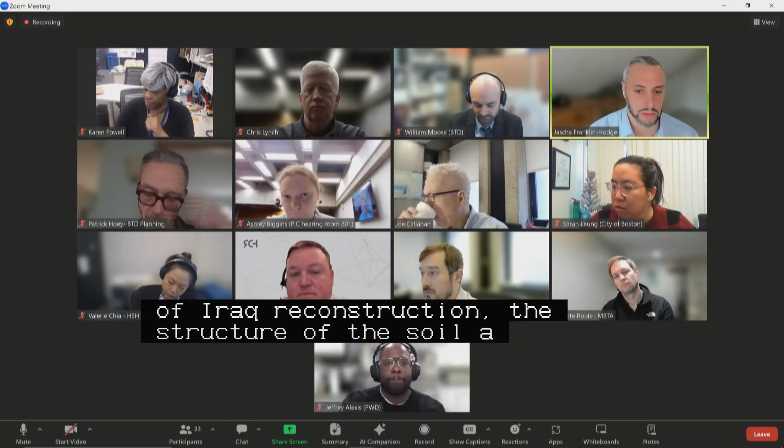So with that, I will read this item into the record. Public hearing number 1, a petition by the City of Boston Public Works Department for the making of specific repairs within the following public ways in South Boston, consisting of curb realignment, roadway and sidewalk reconstruction with structural soil, as well as new and relocated pedestrian ramps, specialty pavement, street lighting infrastructure, street trees, storm drain infrastructure, bike racks, street furniture, bollards, trash receptacles, raised crosswalks, protected bicycle facilities, and driveway curb cuts. Congress Street between Sleeper Street and Boston Wharf Road, Sleeper Street between Congress Street and Seaport Boulevard, A Street between Congress Street and Melcher Street, Boston Wharf Road at Congress Street, Seaport Boulevard at Sleeper Street.

This was new business on March 14th, as shown on a set of plans entitled City of Boston Public Works Department Engineering Division, Specific Repairs Plans, Congress Street, Sleeper Street, and A Street, South Boston, 19 sheets dated March 28th, 2024. Would the proponents please introduce themselves, their affiliations, and give us an update on any changes since your new business hearing, as well as any potential progress on some of the outstanding community issues that were identified in new business.

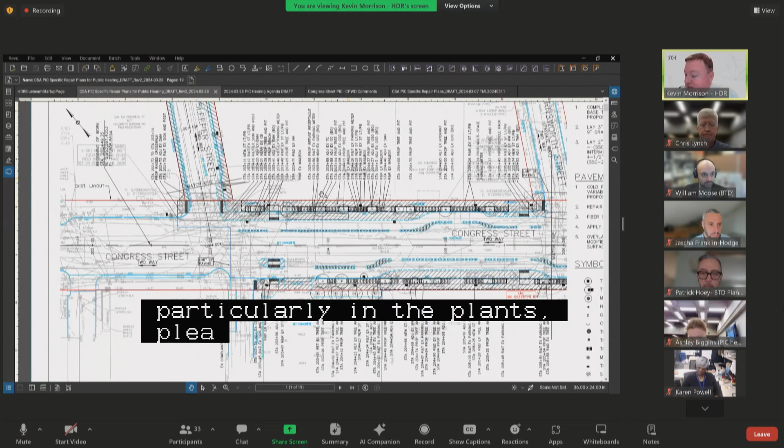At Congress and Sleeper, we're currently proposing that raised crosswalk. We're doing everything we can to double check to make sure that we're making every kind of improvement we can at this spot. We do have a proposed curb bump out into Sleeper Street, which narrows the crosswalk length, and the combination of that and the raised crosswalk will really highlight the pedestrian first priority that we're really trying to establish here.

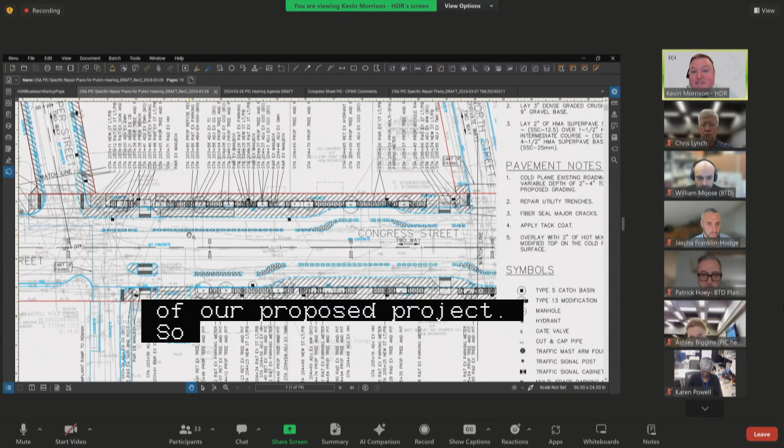The rest of the sheet is pretty much the same as you had last time, but we have separated cycle tracks at roadway level on both sides of Congress Street as part of our proposed project, completely separated from the roadway. We also have bumped out the sidewalks significantly. The sidewalks on Congress Street are at least 10 feet wide, and are in many areas just up to 17 feet wide where possible.

Kevin, if I can just chime in here, there was a comment about having a minimum 4-foot wide passageway from the walking pathway to the cafe or seating areas, and on the north of this sheet, you can see the outline of a potential location for the blue bikes, but we added the passageway to the right of that. To the east, you can see by the mailboxes. That area's exact use is in flux, so the location of that passageway is also in flux.

Likewise, we had passageways to the cafe spaces that we want to make sure the owners of the cafes work out with them, but there are passageways to all of the areas that are either existing cafe or future cafe spaces.

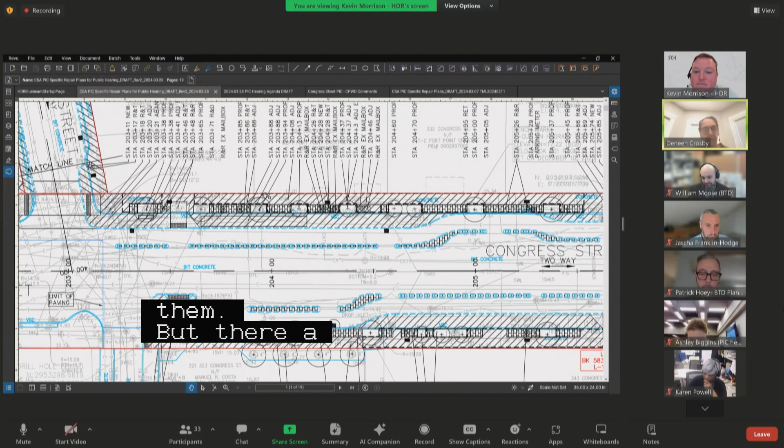Thanks, Deneen. We did receive one comment from Disabilities that the landscaping strip with the existing and proposed street trees is in the exact same spots as today. That's because the underground utility conflicts under Congress Street are pretty extreme, from curb to curb, the entire street's utilities. We did try to see if we could push those landscape strips out at one point, but with the utility conflicts it was just impossible.

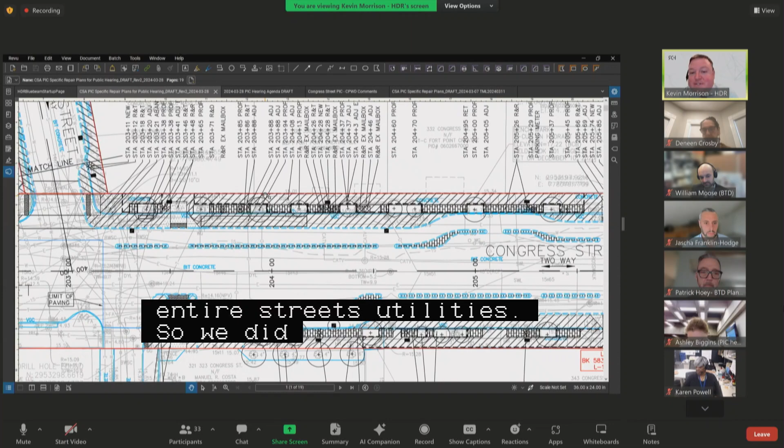So we have at least a minimum 5-foot wide path to travel along the building faces. We have that landscape strip with occasional concrete cut-throughs to get to the wider sidewalk, and then where possible, we have that extra sidewalk space out into the road. We have some benches in that area, cafe space, whatever that may be.

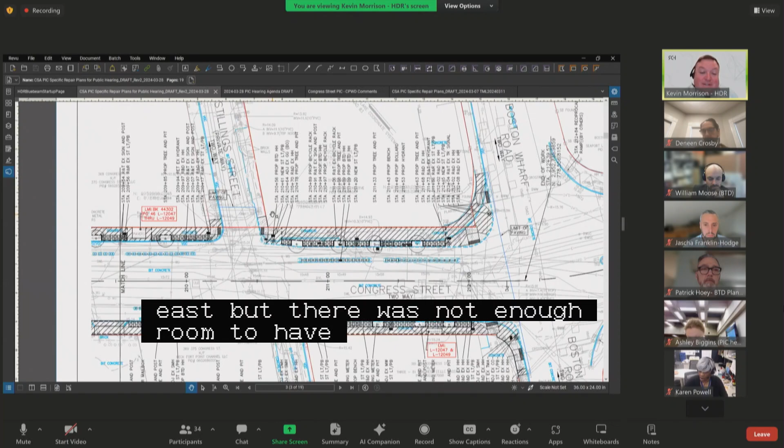Frontage Street also has a raised crosswalk. One change we had to make, and we don't take this lightly based on the tragedy that just happened at Sleeper Street, is at Stilling Street we had to remove the raised crosswalk we had originally proposed. That's because the sidewalk at Stilling Street on Congress Street on the north side is 10 feet wide. We are making it slightly wider to the east, but there was not enough room to have a raised crosswalk and have the accessible path of travel lie entirely within the city's right of way. That's because Stilling Street is not a city-owned street, it's a private way.

We're still looking to see if there are any other improvements we can make, but for now that raised crosswalk had to be removed. The other ones we had proposed all still remain.

On Sleeper Street, working with Dan Miller at BTD right now, while they're not shown on the plan yet, we propose to add 2 speed humps onto Sleeper Street. We have 2 locations we've picked that work from a drainage perspective and traffic safety. We're working with BTD to get those added to the plans, and those will be put in before the site goes out for advertisement.

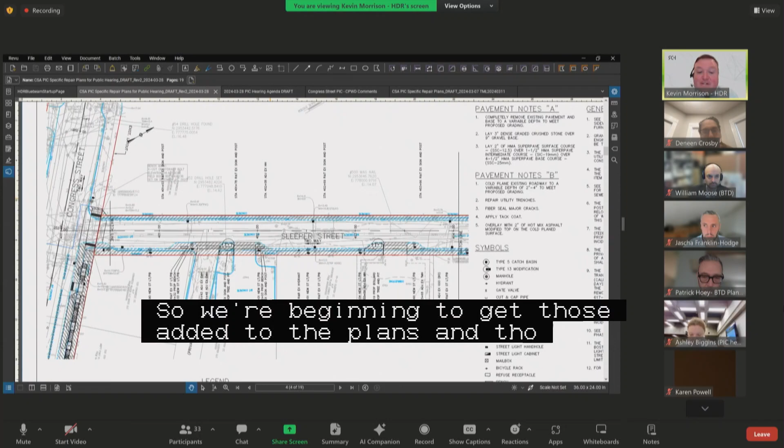Also on Sleeper Street, and 2 other locations on this project, we added in reciprocal ramps. This was both a PIC and Disabilities Commission comment, so we have these new reciprocal ramps added in. The one at Sleeper Street and Seaport Boulevard will require an architectural access board variance. The existing slopes coming off the Moakley Bridge and around the corner to Martin's Park are very steep, so we can get an accessible ramp in, but the ramp going around the corner up onto the bridge won't meet the maximum slope requirements from AAB, so we'll be pursuing a variance for that.

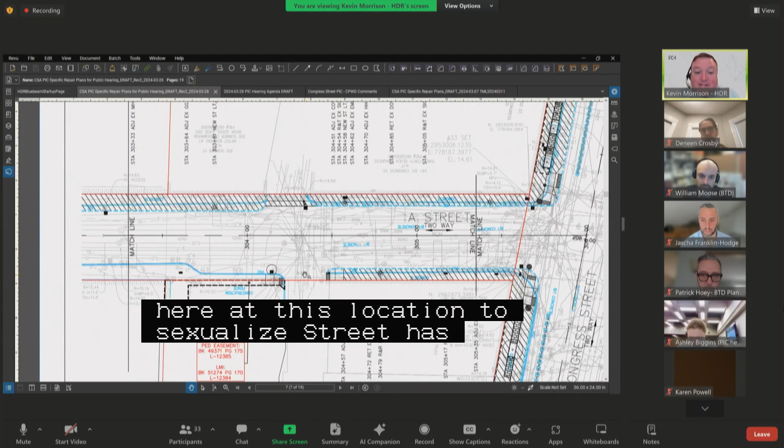On A Street, the same thing: we're going to be adding in a reciprocal ramp at the alleyway underneath the Summer Street Bridge. We're also adding in a catch basin at this location. This section of A Street has very poor drainage, and adding a catch basin while we do the ramp will help take care of that and eliminate a recurring problem on that stretch of street.

Another added benefit on A Street: we propose a 10-foot sidewalk, which will allow us to have a 5-foot passageway, an accessible route around the existing bridge stair up onto Summer Street, which we have nothing like today. The sidewalks are extremely narrow, so that'll be a good improvement for the community for pedestrian safety.

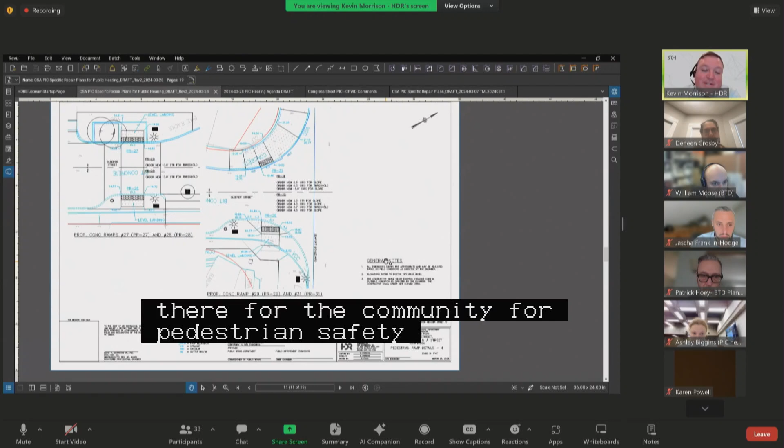Beyond that, we've gone through and met, at least remotely, with BTD. We believe we covered all the comments from both those agencies. For utilities, we did receive some Boston Water and Sewer comments today which I haven't had a chance to look at yet. The only other response we got from the utility agency was National Grid. They may be looking to improve some of their gas infrastructure before this project goes out for construction. So that's just the consultants, and we're working with Public Works and the utility company to coordinate that effort.

But other than that, the design is mostly unchanged from that point.

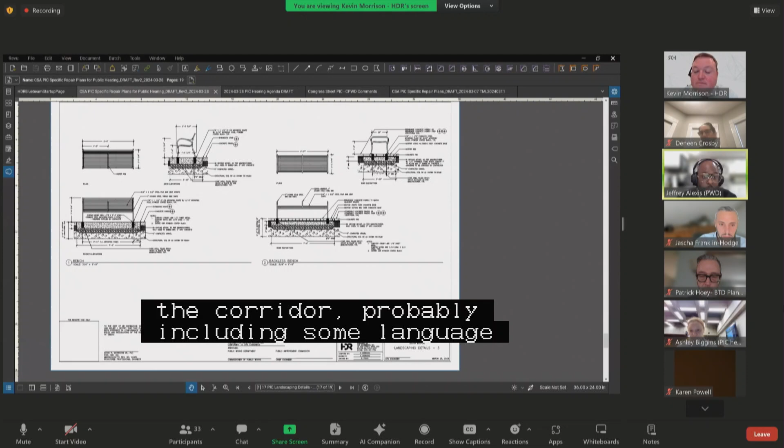We will be working with Boston Water regarding infrastructure located in the sidewalks, and maybe some conflicts with the street trees. We'll continue to work with OGI as well as the Parks Department to figure out the best path forward to provide street trees along the corridor. We'll probably include language in the contract to address it, should utilities be discovered where we're proposing a street tree—we'll look at providing something else. But ideally we're going to try to provide street trees along the corridor. We'll look at species; they'll be within the existing line of street trees on the corridor, but with the permeable paver strip, it should allow the roots to get enough water without impacting the sewer infrastructure. We're working on that and will definitely have a way to address it as part of the final design.

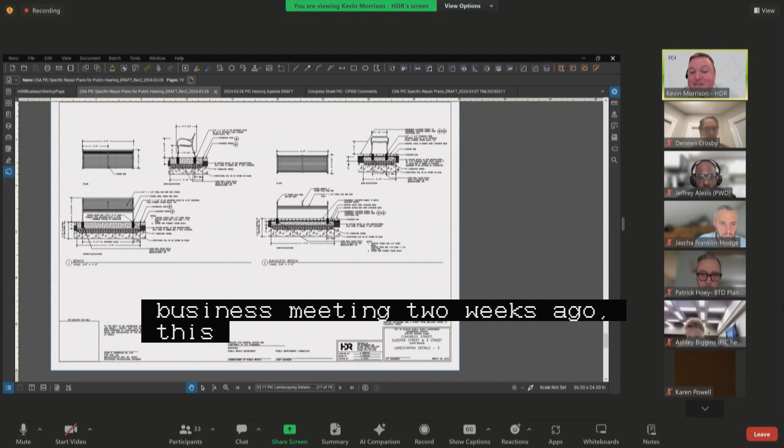Thanks, Jeff. For those who didn't get a chance to see this at the new business meeting two weeks ago, this is a proposed rendering of what Congress Street will look like, looking eastbound toward East Street from Farnsworth Street.

Hey Kevin, I'm seeing the plan—I don't know if it's something else you're showing. Apologies for that. All right, hopefully that's better. This is the proposed rendering of Congress Street at Farnsworth looking eastbound.

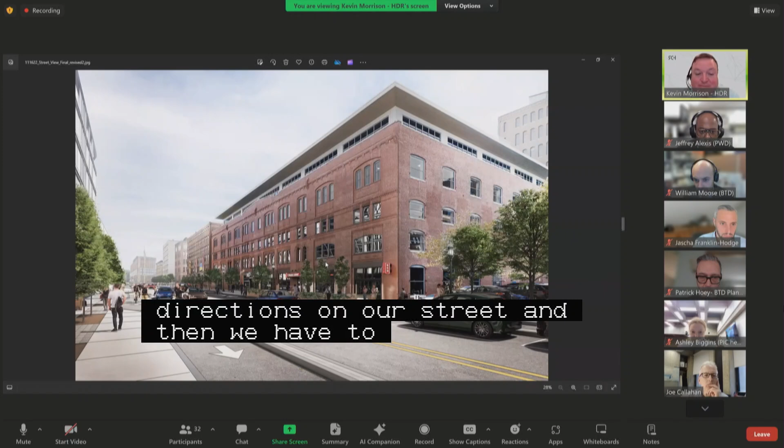This will give you a much better idea than what the plan can show. Again, we have the widened sidewalks beyond the landscaping strip where possible, and the curb-separated cycle track facility in both directions on Congress Street. We also have improved street lighting and new street trees wherever possible, where they don't conflict with utilities, all in the same row as the trees that were there, as Jeff just mentioned. Overall, this is a very worthwhile improvement to a corridor that desperately needs it, and we look forward to making these improvements to this neighborhood.

Thank you very much, appreciate that. With that, I'll open it up to commissioners for questions or comments.

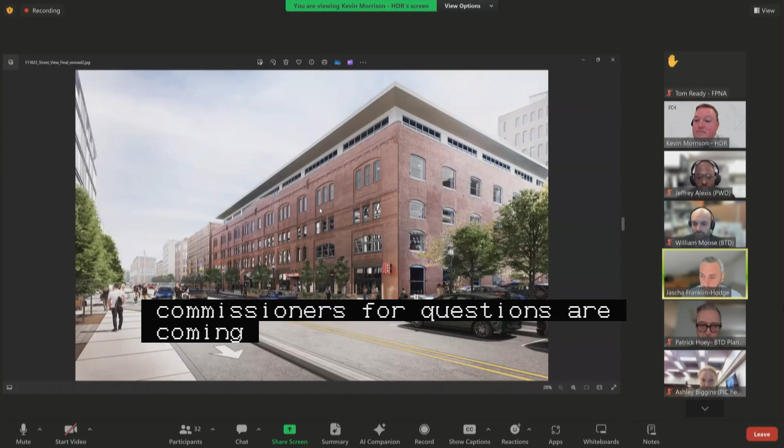All right, hearing nothing from members of the commission, I see Tom has his hand up. Tom, go right ahead. Thank you, Chief. Tom Ready from Fort Point Neighborhood Association.

Thank you for your comments regarding the tragedy on Sunday. I just wanted to reiterate thanks for the words regarding the tragedy, and remind everybody in the city and our elected officials that their four-year-old had a name—her name's Gracie. With regard to community engagement on this project, we're very happy with the amount of effort the city put in.

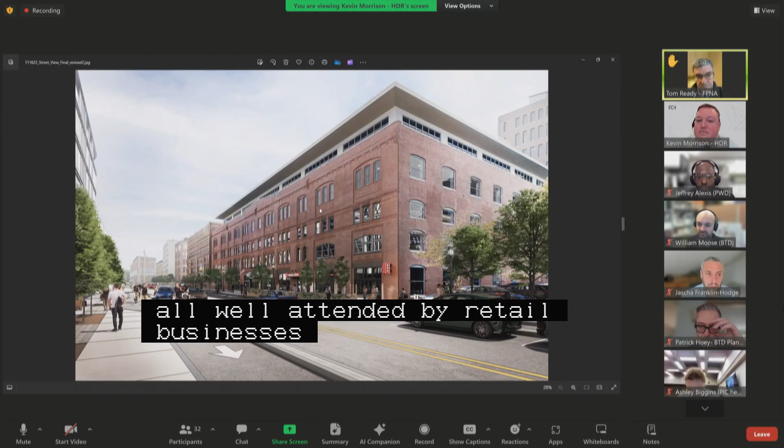As I stated earlier in new business, a number of meetings took place, all well attended by both retail businesses on the ground floor along Congress Street as well as the residential buildings abutting the project. All of the issues that were identified and raised seem to have been addressed. There was one outstanding item we'd raised in new business, relocation of existing resident permit parking, and BTD has been responsive in that regard, so we're looking forward to that. We don't expect any issues with that, Chief.

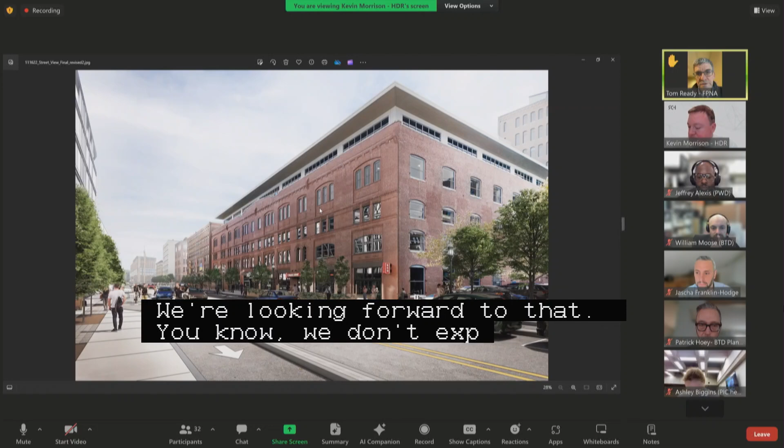Just a quick question with regard to construction phasing. Assuming this gets prioritized, funded, and construction begins in '24, '25, does the construction management plan get put together like a typical commercial building? How does the community get engaged with regard to the construction efforts?

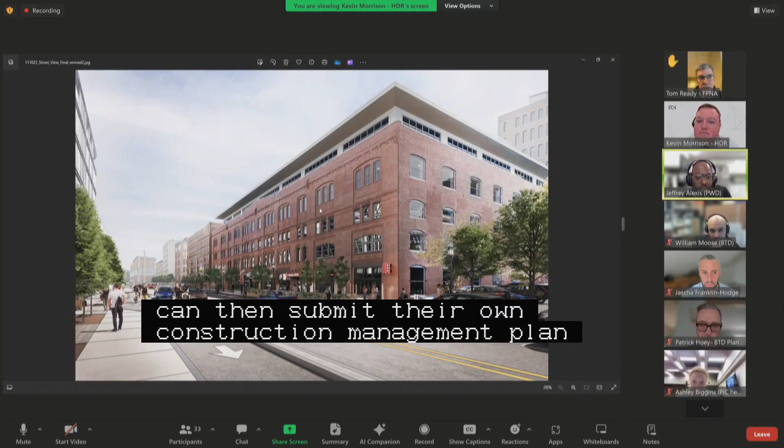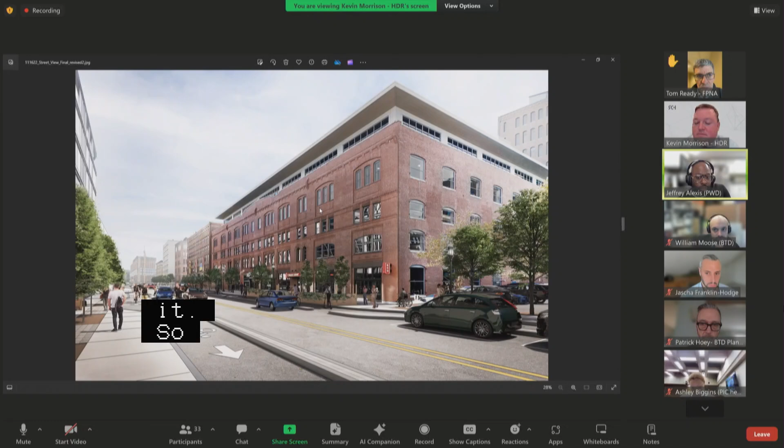Thank you, Tom. As part of this project, we do develop, or the consultant generally develops, a construction management plan for the contractor, but realistically the contractors can then submit their own construction management plan. That's a conversation we can have with our construction management team as well as the community to understand where they should take priority and how to coordinate the work. Ultimately we want to make improvements along the corridor where it's most needed and prioritized, so that's a conversation we can reach out about. Our community engagement and communications teams have been very vocal and transparent about what the city is doing and how. There will be construction updates ahead of and during construction, so we'll definitely reach out and notify the community of when this is going to be happening.

Thank you, Jeff. Commissioners, the neighborhood is in support of this—the sooner we can get it built, the better. That's it, thank you.

Thank you very much, Tom. Any other comments or questions from members of the public, PIC commissioners, or PIC staff?

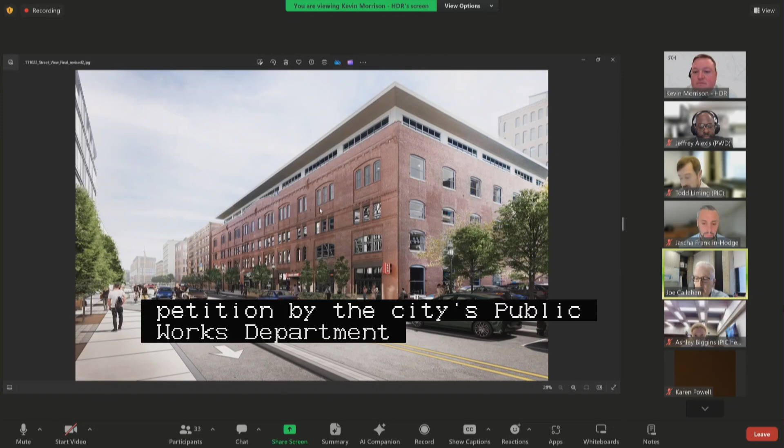All right, with that, do I hear a motion to approve public hearing number 1? I make a motion to approve public hearing agenda item 1, on a petition by the city's Public Works Department for specific repairs in the area of Congress, Sleeper, and A Streets, Boston Wharf Road, and Seaport Boulevard, as further read into the record by the chair.

Second. All in favor? Aye. Any opposed or abstained? So moved. Thank you very much.

Let's get this built. Yes. Thank you, Commissioner. Thank you, Commissioner.

All right, on to public hearing number 2 on a petition by the Massachusetts Bay Transportation Authority for the making of specific repairs within the following public ways in Boston proper, consisting of curb realignment, sidewalk reconstruction with structural soil, as well as new and relocated pedestrian ramps, specialty pavement, street lighting infrastructure, street trees, storm drain infrastructure, bike racks, street furniture, trash receptacles, driveway curb cuts, green stormwater infrastructure, and a raised crosswalk.

St. James Avenue, generally between Dartmouth Street and Trinity Place south of St. James Avenue. This was new business on March 14th, as shown on a set of plans entitled City of Boston Public Works Department Engineering Division Specific Repair Plan, Improvements to Copley Square, Phase 2, St. James Avenue, Back Bay, 5 sheets dated March 7th, 2024.

The proponents please introduce themselves, their affiliations, and give us an update on any changes since your new business hearing.

Morning, I'm Pete Robie, Deputy Director of Active Transportation and Station Access at the MBTA. I'm managing the design of this project for the T with our consultant, Howard Stein Hudson. Valerie Chia here is our representative from HSH, and I will hand it over to her in just a minute. But I've been working very closely with B. Chatfield at Parks and William Moose at BTD. B, William, if you'd like to introduce yourselves.

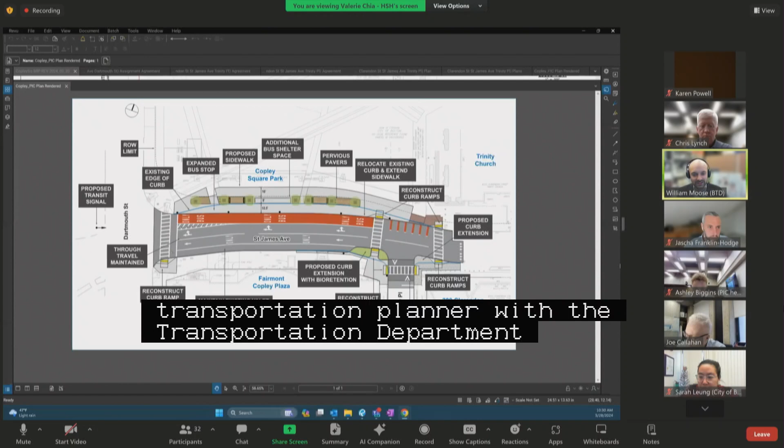And I'll pass it back over to the rest of the team for introductions. Thanks, Pete. William Moose with BTD. I'm a transportation planner with the Transportation Department, and I don't really have much to add. I think Pete and B gave a great intro there, but it's been great working with them on this project, and we're excited to present it to you today.

Thanks. I'll just recap really quickly an overview of the project. This design will upgrade the passenger experience, bus operations, and public realm at St. James Avenue at Dartmouth Street, the bus stop. It will add new trees, pervious pavers, 2 JCDecaux bus shelters, additional bus berthing space, and a new transit signal. It'll also make required accessibility upgrades and safety improvements to the intersection of St. James Avenue at Trinity Place, including a raised crossing and a small bioretention area on the southeast corner of the intersection.

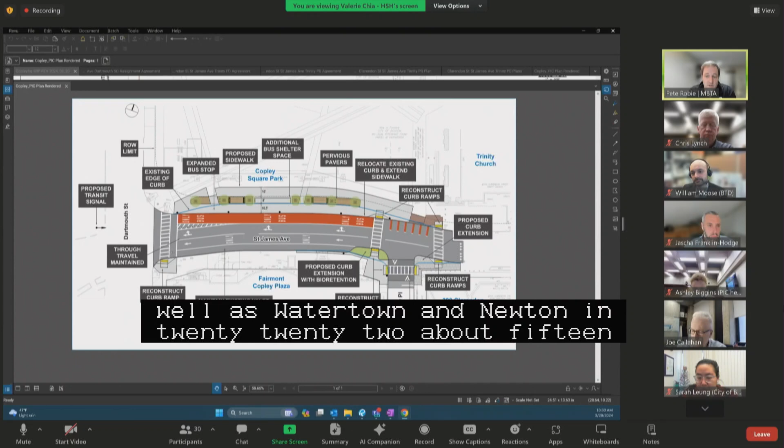The bus stop serves people in 8 Boston neighborhoods as well as Watertown and Newton. In 2022, about 1,500 passengers boarded and alighted from buses here each weekday, making this the 9th busiest bus stop in the MBTA network. In the coming years, the MBTA will increase bus service here by about 60%, making the need to provide additional space for passengers and buses even more critical.

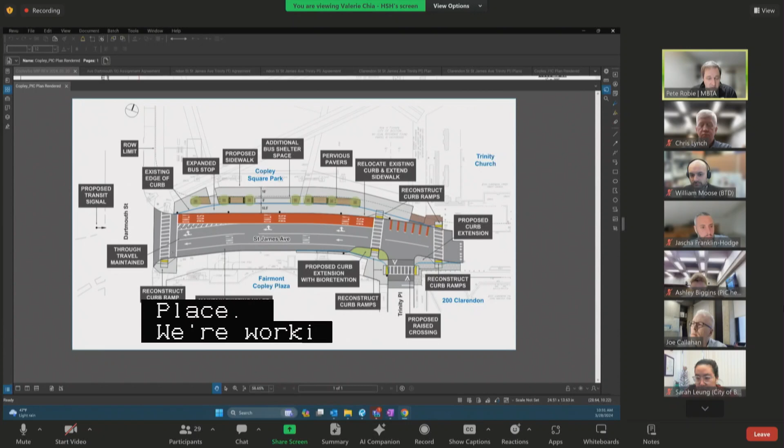So I'd like to address a couple of questions that arose at our new business hearing 2 weeks ago. First, on the question of engagement, we are working with 200 Clarendon and the Fairmont Copley Hotel as immediate abutters to this project. Since 200 Clarendon is licensed to maintain the specialty pavers on the southeast corner of Trinity Place, we're working with them to update their maintenance agreement to include an additional 100 or so square feet that will be added to the streetscape in order to make curb ramps compliant. And as requested, we've also engaged the Back Bay Association and have reached out to the Boston Athletic Association for their input on this site.

Next, it was requested that we develop a plan for maintenance in the project area, and I'm just going to share my screen quickly.

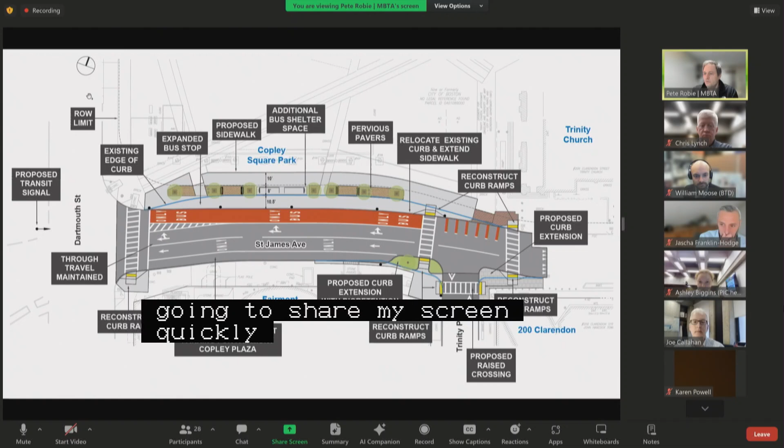Sorry, can you all see that? We're still seeing the plan. Okay, now it works. So we've been working with our respective agencies to determine maintenance responsibilities within the project area.

And we've drafted an agreement which was shared with PIC staff in order to move forward with formal acceptance. This list shows all the business items contained within that maintenance agreement, point by point, for the area.

For most items, we received written or verbal agreement for the responsible parties. Much of this is covered in existing city policy. However, we're still having ongoing conversations about some of the furnishings, such as trash and benches, which we'll look to be ironing out in the coming weeks.

Winter snow clearance will be handled jointly by JC Decaux, according to their contract, the Parks Department, and MBTA's Transit Facilities Maintenance, as part of its Key Bus Routes snow clearance contract. Currently, I believe this stop handles 2 key bus routes and will handle an additional key bus route in the future.

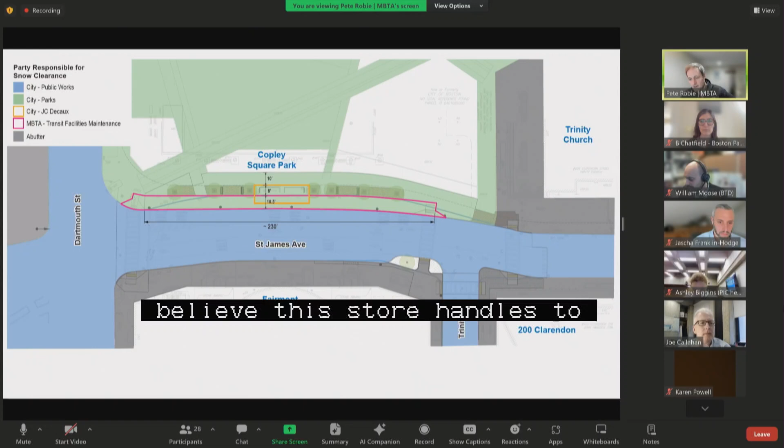This is basically in order to ensure that the stop is well cleared and accessible throughout the winter. This diagram shows where we've landed with those parties in terms of responsibilities and the overlap for winter maintenance. So I will stop sharing my screen and hand it over to Valerie to speak to the specific repair plan.

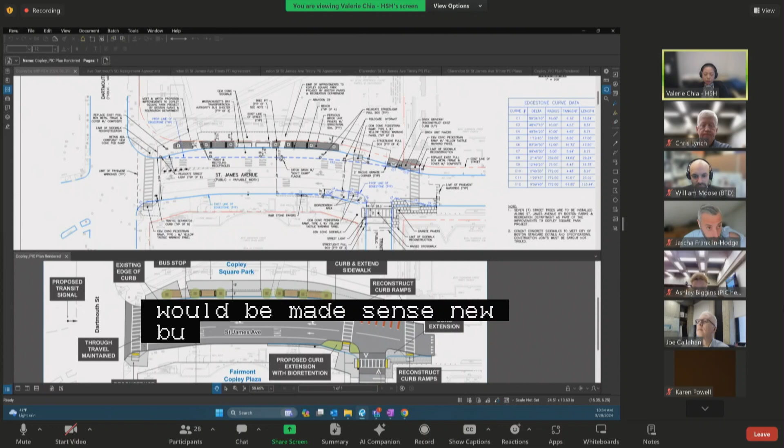Thanks, Pete. Well, you did all the easy stuff because you went through everything that we proposed. I don't really have to explain too much except for the changes that we made since new business two weeks ago. So below and above are the graphics that we showed at new business, showing all the ramp reconstruction, sidewalk reconstruction, proposed raised crossing, the realigned ramps, the bio-retention basin, and this curb extension piece.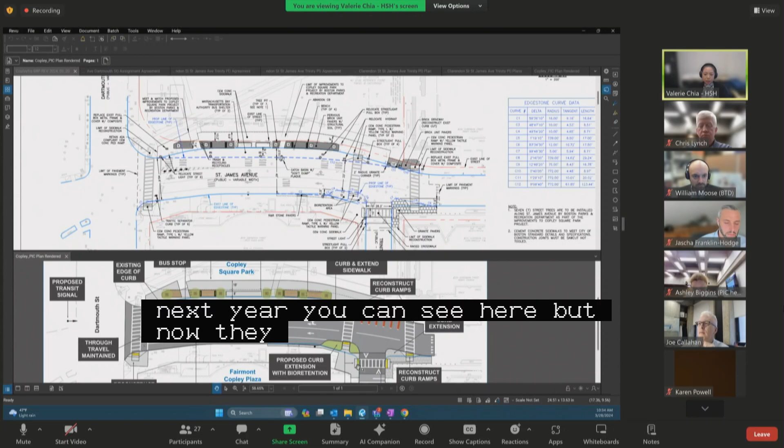Two things have changed since new business are the bus shelters. Previously we were showing one large one, but now they will be two. And then the other change, which is not as noticeable, but we've widened all of our proposed ramps out to 10 feet to match the width of the raised crossing.

Mike, who is our traffic lead for this project, can also talk about the bus bike marking comment that came up at the new business meeting last week, so I'll turn that over to him. Sure. I'm Mike Pompili, Senior Traffic Designer at HSH.

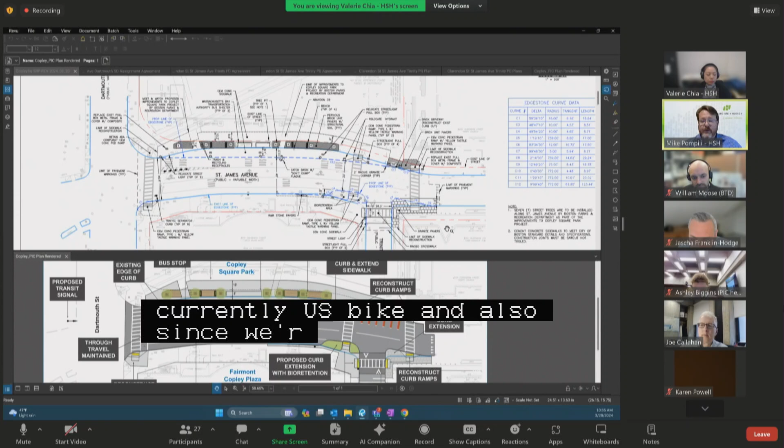We're not showing the bus bike lane because this is an existing bus lane that comes into the study area from the east on St. James Avenue, which is not currently bus bike. Also, since we're expecting a 60% increase in bus service at this stop, plus with layovers, it would introduce conflicts with bikes approaching in a bus bike lane with buses stopped at the Copley Square stop.

They would need to merge into adjacent traffic. So we felt that keeping the bikes in the travel lane instead of sharing the bus bike lane was the better approach for this project.

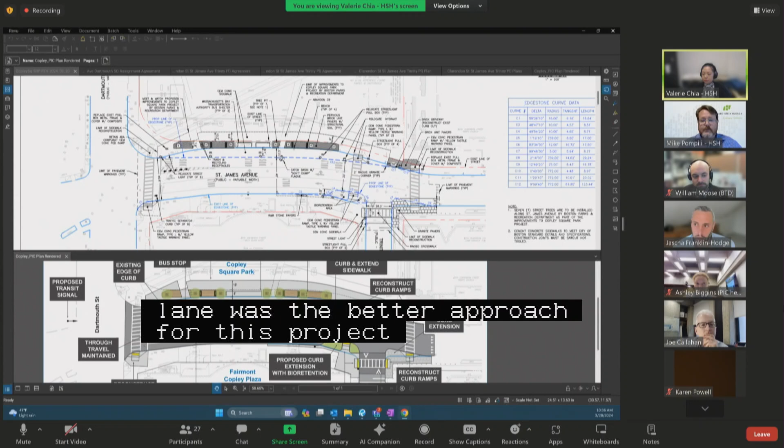All right, any additional updates? I think that covers it. All right, commissioners, questions, comments?

I just want to thank the project team for working collaboratively with my office over the past, I think it was six months, seven months since September. So just want to pass on those sentiments from our office.

Likewise, thank you, Sarah. We appreciate your input. You've been there for every coordination meeting. We really appreciate having you.

Commissioners, other comments? All right, hearing none, PIC staff or members of the public?

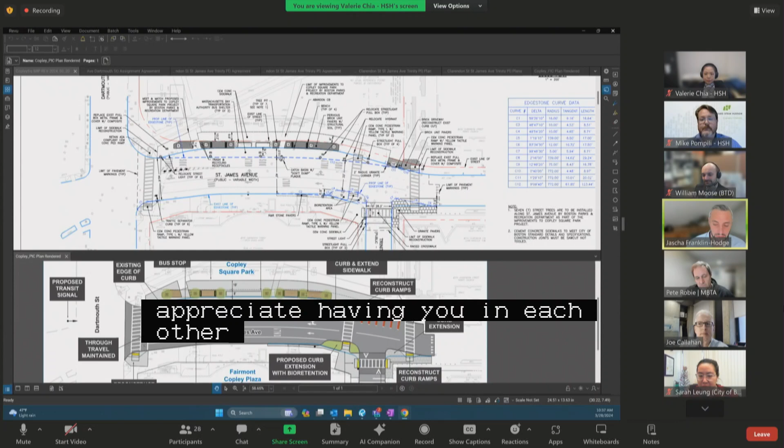I think we're all set on this. I appreciate Pete's work on the maintenance agreement stuff. I'll continue working with him and Chung to make sure that we get all of those documents ironed out before we issue permits.

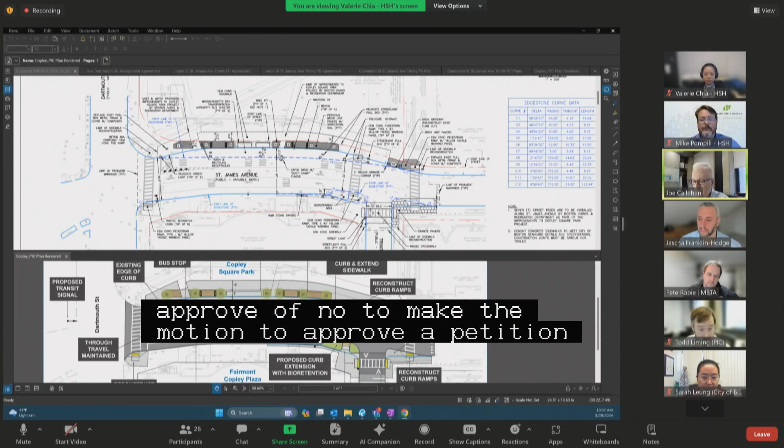All right, do I hear a motion to approve public hearing number 2? Make a motion to approve a petition by the Mass Bay Transportation Authority for specific repairs in the area of St. James Avenue and Trinity Place, as further read into the record by the chair. Second. All in favor? Aye. Any opposed or abstain? So moved. Thank you very much.

On to public hearing number 3 on a petition by SFH 48 Boylston Street LLC for the acceptance of a pedestrian easement adjacent to LaGrange Street, public way, Boston proper, located on its northerly side at address number 41, generally between Tamworth Street and Washington Street. This was new business on March 14th, as shown on a plan entitled City of Boston Public Works Department Engineering Division Pedestrian Easement Plan, 41 LaGrange Street, Boston, Chinatown, one sheet dated October 24th, 2023.

The proponents please introduce themselves, their affiliations, and give us a brief update on this project and any changes since your new business hearing. Hello, Commissioner, thank you to the Commission. My name is Carla Chaffee. I'm an attorney at Nixon Peabody, and I represent the Planning Office of Urban Affairs, the proponent of this application. Unfortunately, there was an error with the public notice in the Herald, so we are requesting a 2-week continuance.

Got it. Commissioners, PIC staff, any comments or questions before we move to continue? All right, do I hear a motion to continue public hearing number 3? I make a motion to continue public hearing agenda item 3 to the next PIC hearing on April 11th, 2024. Second. All in favor? Aye. Any opposed or abstain?

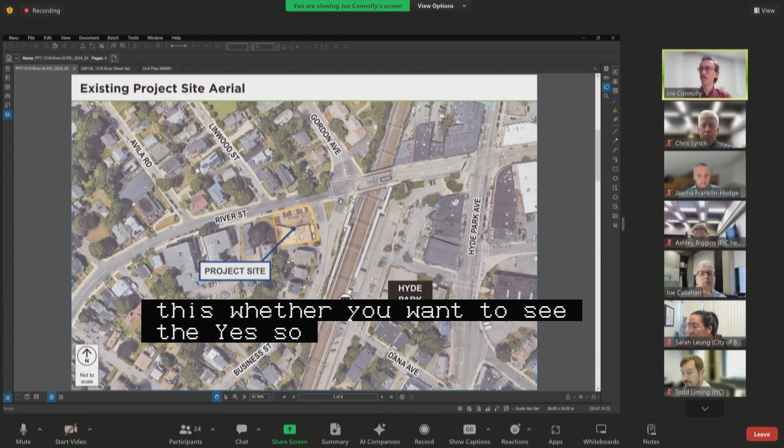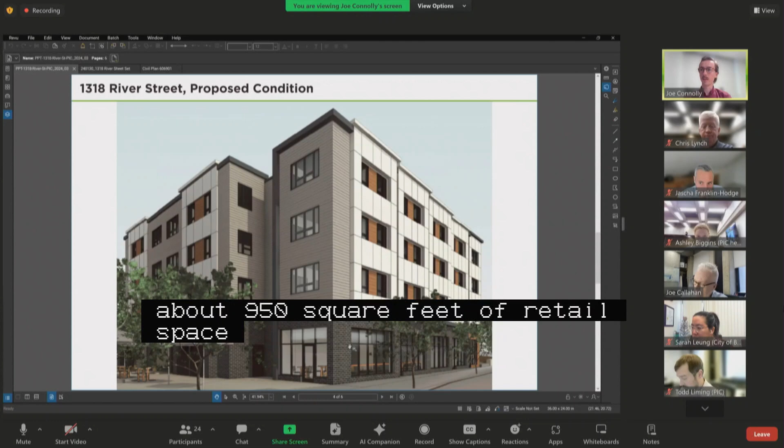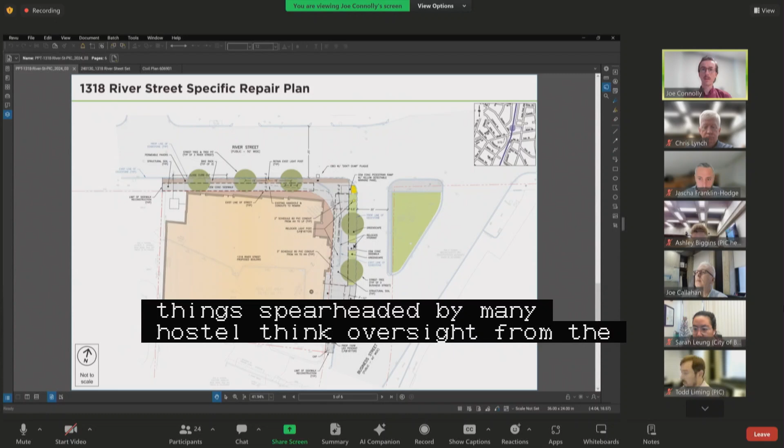And we ultimately determined that this design created the greatest benefit to the public realm, given our constraints with the MBTA parcel encompassing the approach of Business Street, as well as the green space within the traffic island adjacent to our site.

We will also be closing one curb cut of Business Street while modifying another to be used for the garage. From comments from multiple city agencies, we've also incorporated an additional streetlight while relocating another.

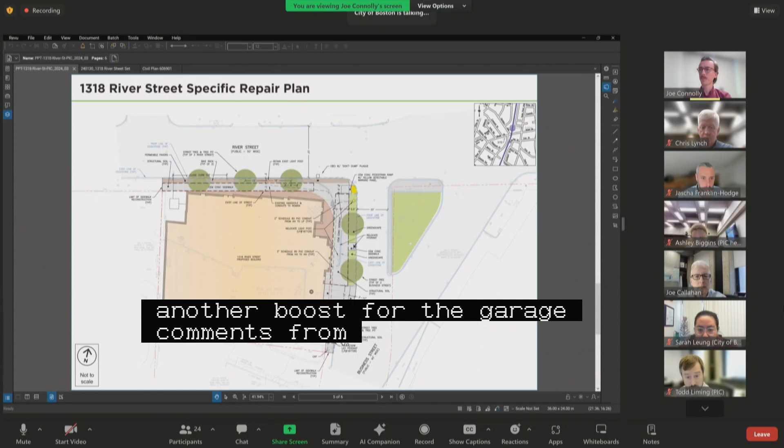There's been some improvements as far as green space that will serve as bioretention areas, while also including proposed street trees.

We also received comments from PIC staff earlier in the week. We will be incorporating a raised crossing across Business Street per their direction, so that will be reflected in the revised plans prior to our public hearing.

So our draft CNP has been submitted, as well as our draft L1, and we are currently coordinating with Boston Water and Sewer and site plan approval. With that, I will open it up to questions.

Thank you very much, commissioners. Hearing none, PIC staff or members of the public? I think we're all set on this. Looks like Mr. Craig Martin has his hand raised. Go ahead, Craig.

Thank you, Mr. Chair. I'm Craig Martin from the Hyde Park Neighborhood Association. I've been very involved with this proposal a couple of years ago. And I can be honest with you, I could hear this whole hearing except for that presenter right there, Howard Stein Hudson. I don't know if the commissioners had the same experience, but he was very hard to hear.

The main question I do have is the Business Street leg that is currently owned by MBTA. How was that arranged? Has there been any change in that? Business Street that you're using as a public way is owned by MBTA. I want to know if it still is.

Yep, that's still the case, and that's why we kind of had to revise our approach. It's no longer going to be discontinuing this leg of Business Street with a larger public plaza.

Okay. Well, so you're going to keep the two legs of Business Street onto River Street, correct? Correct. Okay. I'll be honest with you, in all fairness, we had to go through meetings and we had hollering matches. There was so much disagreement.

And I thought it should have been fair to bring it back to the neighborhood association when you're making a major change to a proposal before it goes to the Public Improvements Commission. It may well be that we're all very supportive of this change, but I don't know anything about it, and I'm with the Hyde Park Neighborhood Association, which was addressing this matter.

I don't know if we should be getting any approvals or what have you today, until they met with the community.

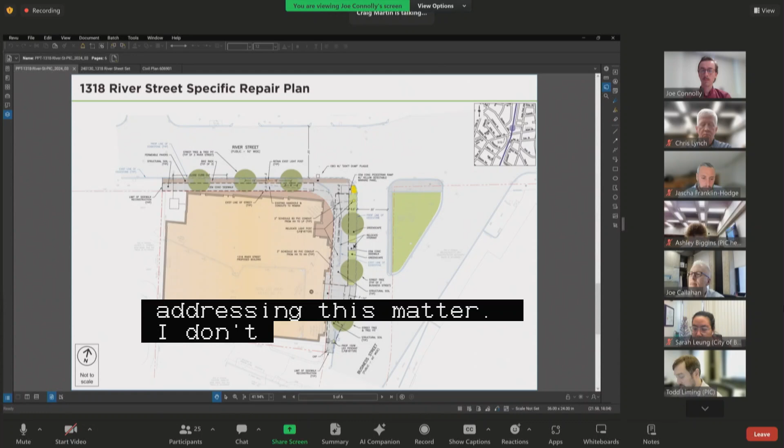Again, we had several meetings with BPDA. We were hollering for a traffic study. We may well not need one now if we made this change, because you're not closing a leg.

BPDA promised us a traffic study over and over again at the meetings, and the last meeting they said, nope, we're not going to do that. But it might well be that we don't need one now if you're not closing that extra leg, but we don't know.

Yeah, I'd love to see if this could be continued to April 11th, and they could give us a quick overview through our elected officials or what have you, or at our community meeting.

So traffic patterns shouldn't be impacted. The only thing we're doing is reducing the width of the left leg of Business Street to accommodate an increased width of sidewalk. Reducing the width of that second leg that goes onto River Street, right?

Right. And now the memorial that's in the middle of Business Street - has anything changed? That's not that aspect? No. Are you still connecting that to your parcel? Nope, that's no longer part of our project.

So like, that's right. And again, this all sounds good, but the thing is that the zoning board of appeals was gung-ho about this proposal because of that aspect, that you were actually connecting the memorial and having a bigger, what they were referring to as a pocket park.

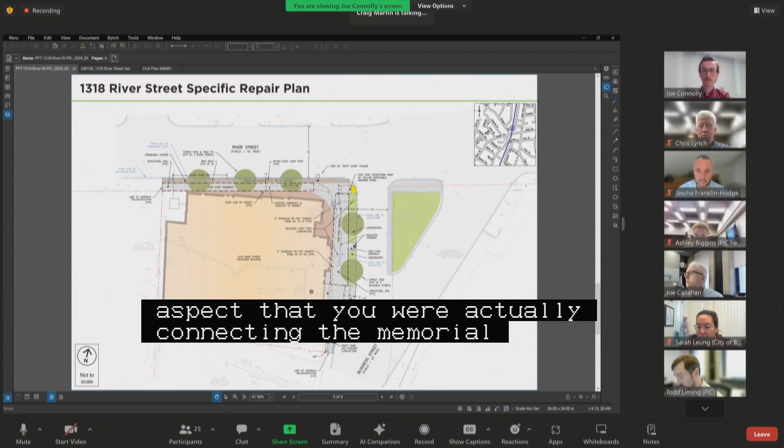And that's why they approved this so gleefully. That's not part of the proposal anymore. Again, I bet you we're going to support this, but gee whiz, I'd like you to bring it to the Hyde Park Neighborhood Association just so we can have a quick view of the diagram.

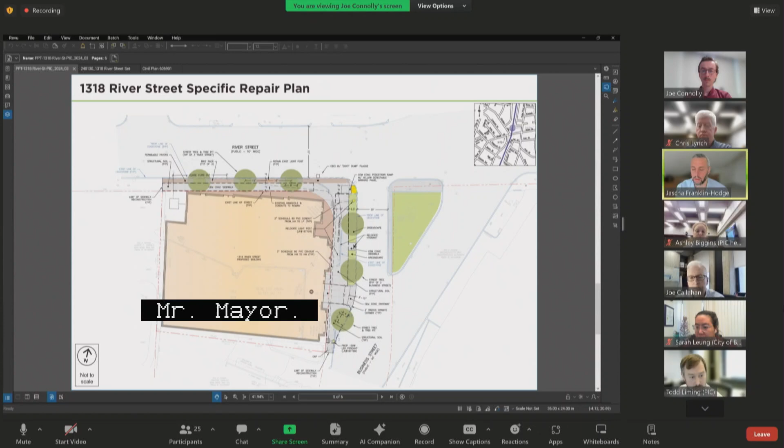Would the proponents be willing to... thank you, Mr. Mayor, for those comments. Would the proponents be willing to meet with the neighborhood association between now and the public hearing in 2 weeks and present these changes and provide a little bit more context behind this change?

Yeah, absolutely. This first Thursday in April at the municipal building at 7 o'clock, our community meeting and our monthly meeting. First Thursday at the municipal building in April at 7 o'clock. Okay, we appreciate your attention to this. We can facilitate an email connection just to coordinate around that, and hopefully that presentation will happen.

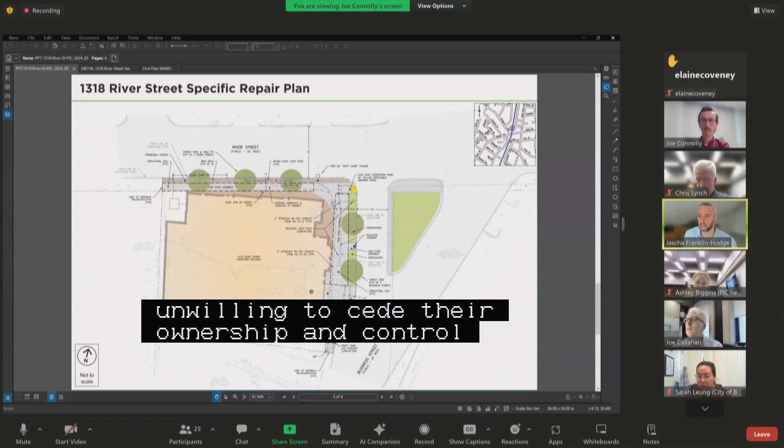Just for the record on this, my understanding is that the decision not to close this leg of the street was not ultimately that of the proponents, but rather that of the city, the PIC, and the Public Works Department, because the MBTA was unwilling to cede their ownership and control over the other leg of Business Street. It was determined that it would be inappropriate to discontinue the public right-of-way here, because in some hypothetical future state where the MBTA was to exert their property rights over the other leg of the street...

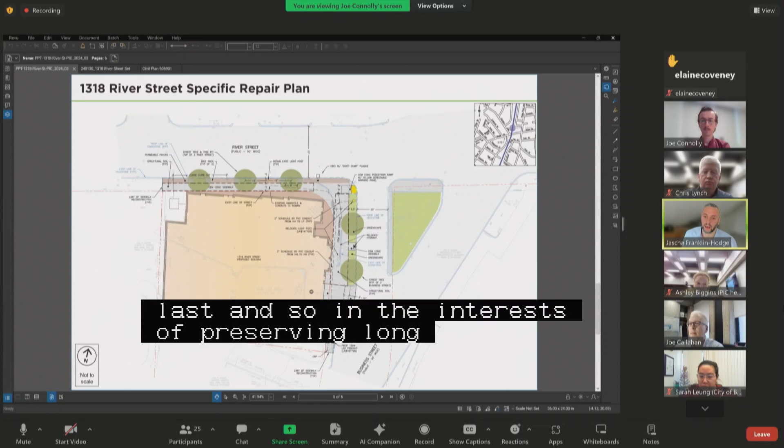If we had closed this leg in front of this proposed development, there would have been no street left. So in the interest of preserving long-term access to ensure there is a street connection here, the city determined it was necessary to keep this leg of Business Street open since we could not secure a permanent long-term right to the other leg. So that's my understanding of the background behind the decision to leave this open.

That's the right decision, and I'm so very glad to hear that on behalf of the neighborhood association. But again, if you just email highparkneighbors@gmail.com, and if you confirm you can come to the April meeting for a quick 5-minute overview, just point out what you changed and move on, and we'll be thrilled.

Understood. Yeah, it sounds like the proponents are planning to be there. So thank you so much for your time, Mr. Chair. Thank you. There's one other hand up briefly, Elaine Coveney, but it looks like that hand has been lowered. Elaine, if you'd like to speak, you're welcome to.

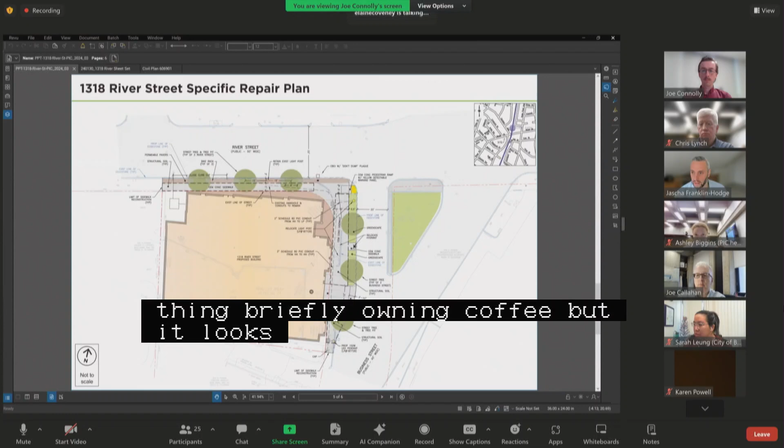I'm the secretary of the Hyde Park Neighborhood Association, and I just wanted the contact information for Mr. Connolly so that we could communicate about the meeting on Thursday. Sure, I can put you all in touch offline via email after this hearing. Great, okay, thank you.

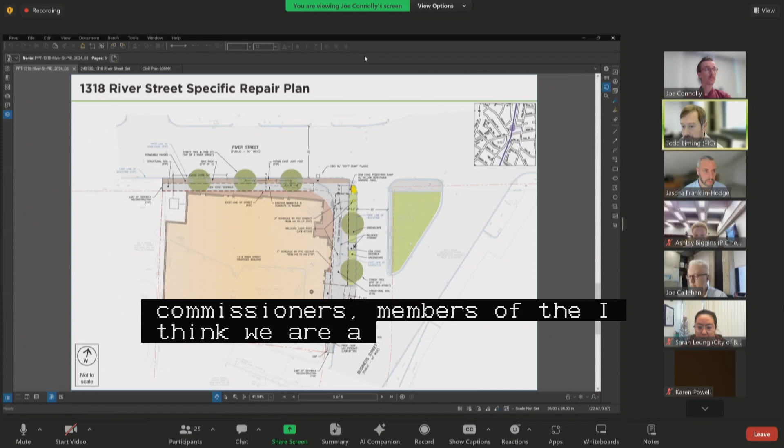All right, any other questions, comments, commissioners, members of the public, PIC staff? I think we are all set. I know these plans have been a little bit of a moving target through no fault of the project team, so we really appreciate their understanding and patience as we, the city, work with our colleagues at the MBTA and others to try to figure out the best course of action here.

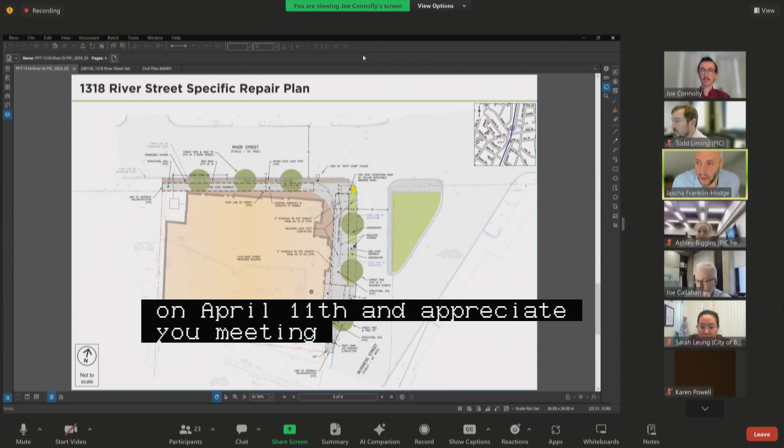I understand it probably hasn't been easy, and for that I sincerely appreciate the time and effort you put into this. Thank you. All right, with that, we will plan to see you for your public hearing on April 11th and appreciate you meeting with the community in between now and then. If there are any changes or adjustments that come to the plans as a result of that, just work with PIC staff on those issues. Will do. Thank you again.

All right, on to our final item, new business number 2, 30 Park Street, Warren Street, Henley Street, Charlestown, specific repairs on a petition by 30 Park Street Condominium Trust. Would the proponents please introduce themselves, their affiliations, and walk us through what is being proposed here?

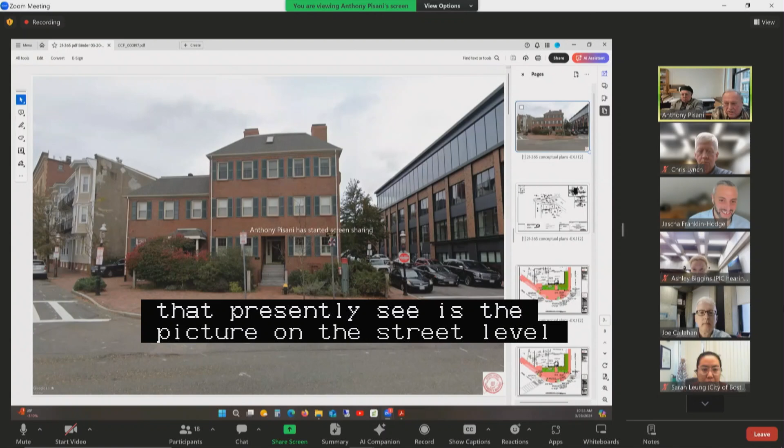I'd like just to walk you through the history a little bit of it, if I may. Mikey, if we can slide down with these. I purchased this property, was built in 1985. I purchased it in 1987, just before the reconstruction of City Square began.

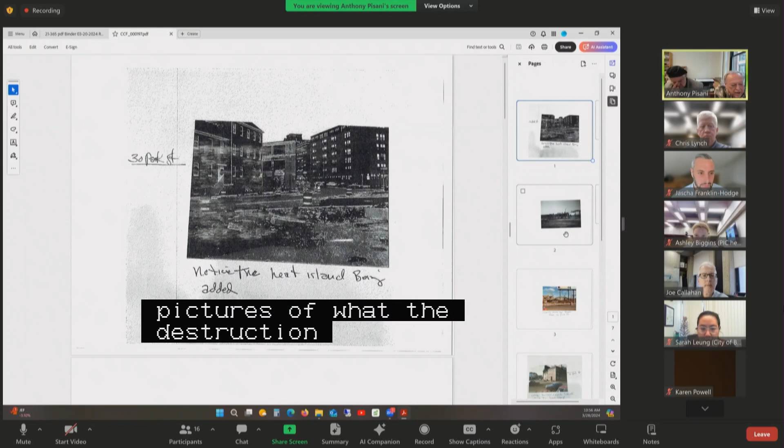This is what some of the pictures of what the destruction looked like in front of my building. You can see there was no heat island at the time; it was being added. If you could keep moving, Mikey, it would be good. This is a picture from the sidewalk out looking to what was the Route 93 highway and the area that was developed out there. That white building there is called the Ironside Grill. It's been empty for the last 4 years, but moving on.

This was the picture of what would look like from my front door of 30 Park Street. That was the off-ramp coming off of the Tobin Bridge onto Warren Street in Charlestown. It was directly across from my front door.

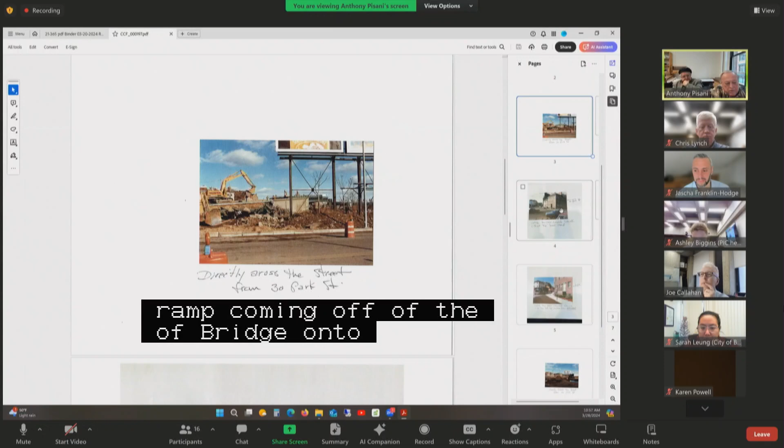There is a picture of what the building looked like as this project was getting wound down. You can see there's a new concrete sidewalk that was put in front of the building, and then there was a wide open area. What happened was Warren Street didn't line up with the property lines, so Mass Highway built this build-out, this bump. It's now called the Heat Island, both at the Ironside Grill, the white building on the left, and in front of myself. So that's how we wound up with it.

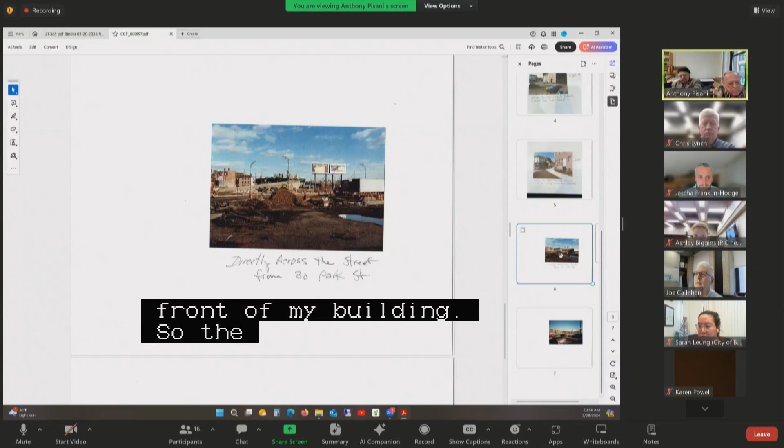And they paved it over, extended it out, built a heat island. They then put red bricks over the hot top and over the concrete sidewalk. And there we go, there's another picture of the off-ramp that was coming down in front of my building. So the off-ramp created a lot of not clean dirt and so forth. But we wound up with this heat island.

Since that day, 1988, there have been numerous trees planted in front of my building. They just all died because the soil, I believe, is just all rocks and dirt, polluted soil. There's another picture of the ramps and so forth across the street from me.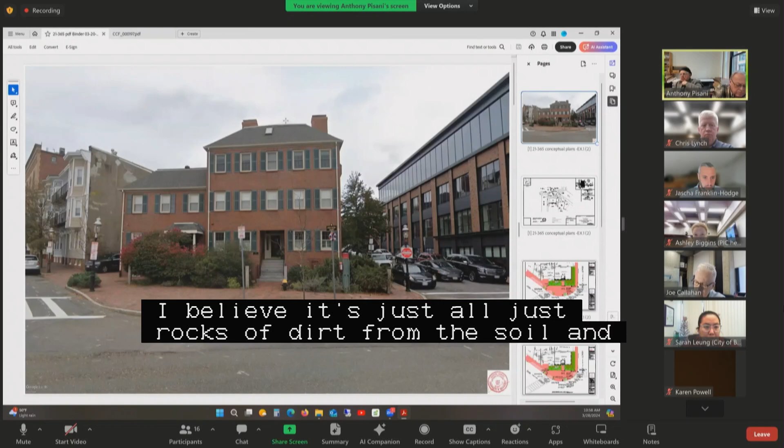So the purpose of this is to try to cut down the size of the heat island, reduce the size of the heat island, and allow some clean fill to be put into a planter area that will help the trees grow, because there had been the off-ramp there before. And also encircle the planter with a low-level 13-inch high fencing to keep the dogs off the planter and give them a chance to grow.

We've planted many trees there over the years. None of them take, none of them grow. Since 1988, we've been chasing trees there, and it just doesn't happen. We'll be replacing the 2 trees that are presently there, which are basically not that healthy, with 3 new trees. So with that, I'd appreciate your consideration on this matter.

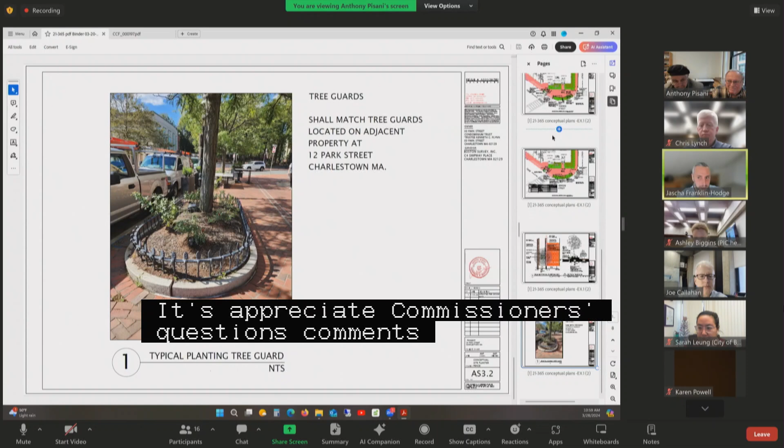All right, hearing none from others, I have a couple. So can you go back to your plan showing the dimensions, the plan view here? Yeah, thank you. The next one up. Next one, Lance. Yeah, this is good.

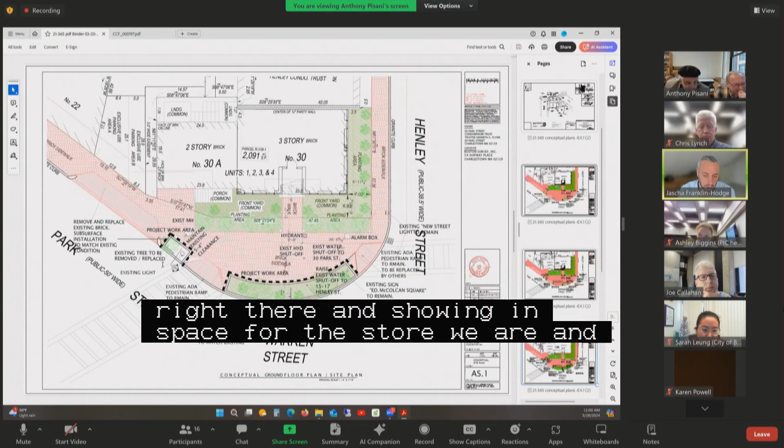So one item related to the crosswalk in the planting area, the small planting area proposed on the left, the bottom left portion of this area. Yep, right there. So it's showing a 5'4" clearance, it looks like, between the edge of that planting bed and what looks like a granite post that is connected to the planting area in front of the building. Is that correct? Yes, Anthony Pisani, the architect. That is the 5'4", 5.4 feet is what the existing dimension is, and that's the dimension that we're holding.

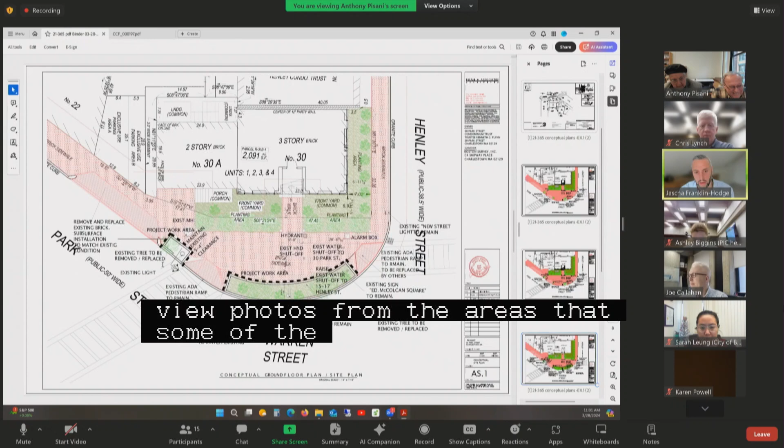Okay, one observation just looking at some of the street view photos of the area, is that some of the plantings in the planting area adjacent to the property are growing out over that pedestrian zone and extending beyond that granite marker, which is narrowing the available pathway there. Can we get a commitment to keep those plants trimmed back so that there's a true 5'4" path there?

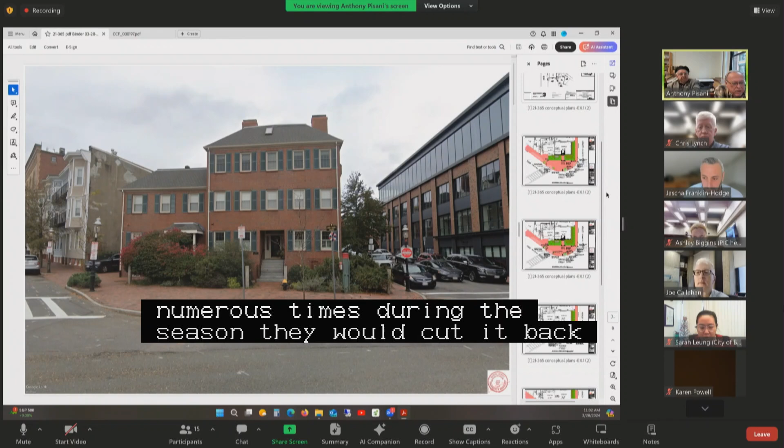All right, excellent, I appreciate that. Beautiful plants, but we want to make sure that people have the available width of the sidewalk to them, right to the brick.

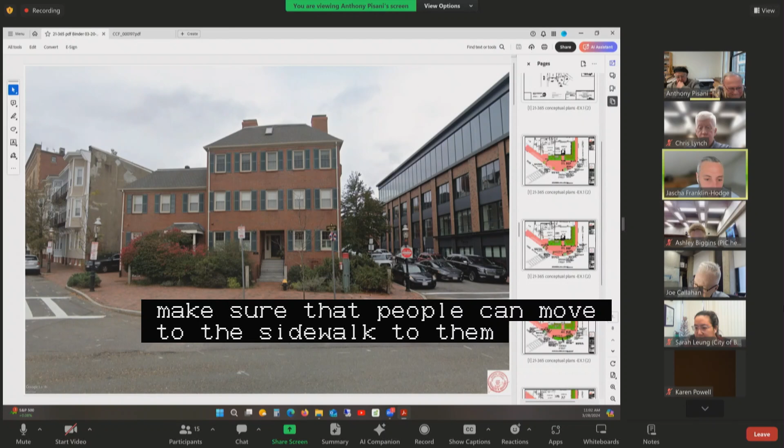I think the next thing I want to talk about, if you can go back to the plan view again: currently this area, these crosswalks or ramps, are not ADA compliant. As you may know, the city is under both a legal consent decree obligation and a moral obligation to make all of our crosswalks fully compliant with the ADA, and these ramps will at some point need to be reconstructed in a way that complies with the Americans with Disabilities Act.

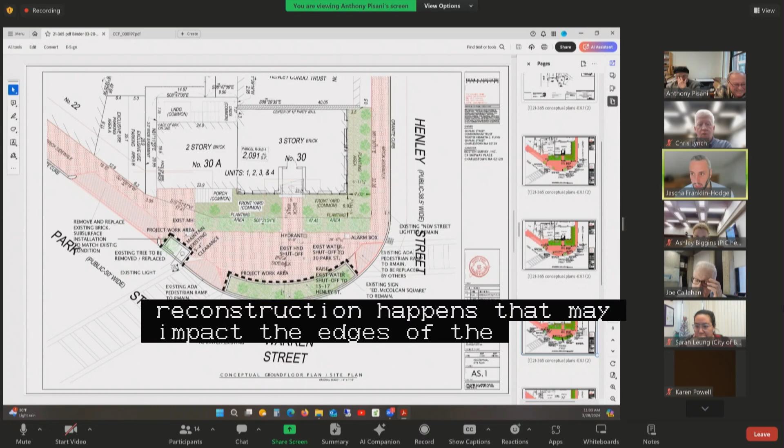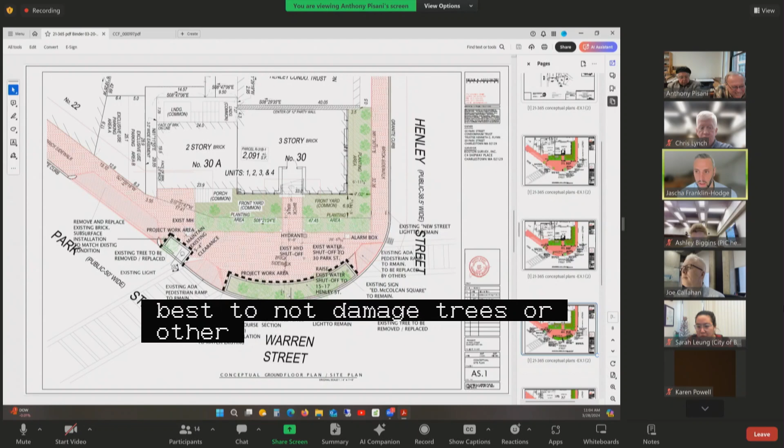I suspect that when that reconstruction happens, it may impact the edges of the planting area and potentially the decorative fence here. We may also do work on the sidewalk for accessibility, given that the brick often has its own set of challenges. So I want to state that for the record, and confirm with the proponent that you understand that if the city does work in this area and it impacts these planting beds, we will do our best not to damage trees or other planting materials, but there may be damage or removal of elements installed here, and the city does not, as a matter of policy, put back specialty materials installed by others on its own dime.

So that would mean that if it's necessary to remove fencing or impinge into the planting area, it would be your responsibility to do any restoration work to bring it back to the condition we're reviewing here today. I want to make sure that's understood, and see if you have any questions or concerns about that.

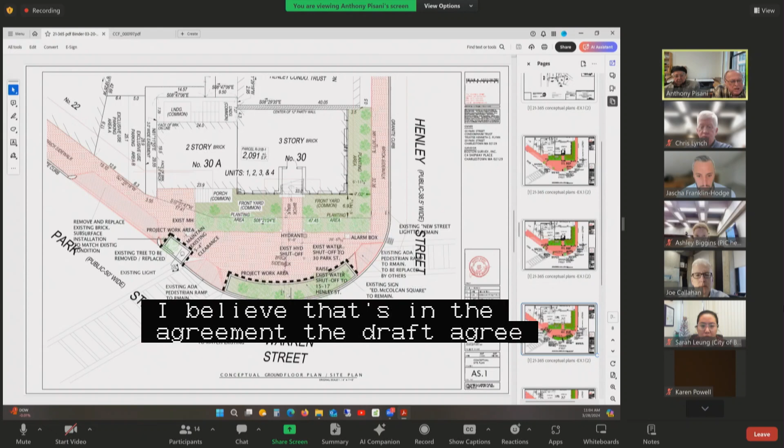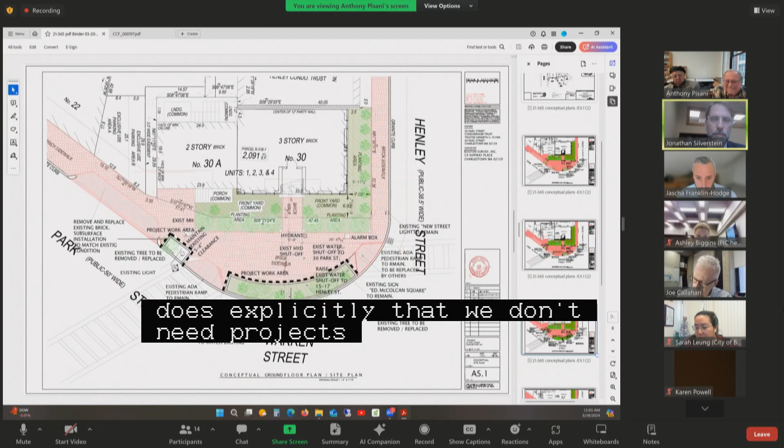Okay, I appreciate that. And in the same vein, just confirming that you intend to fully maintain the plantings in the planted area, is that correct? We plant 3 trees and maybe some small shrubbery on the outer edges to fill up some space. And you maintain it? Oh yes, that's part of the licensing agreement, that I'm maintaining it. And if the trees don't make it, it's my responsibility to replace them. Okay, excellent, excellent, pretty comprehensive.

All right, well we appreciate that. It's somewhat unusual to get these kinds of proposals from a smaller building - they're usually associated with larger projects, so we just want to make sure all bases are covered in terms of maintenance and expectations around this. I don't know that I have any other questions.